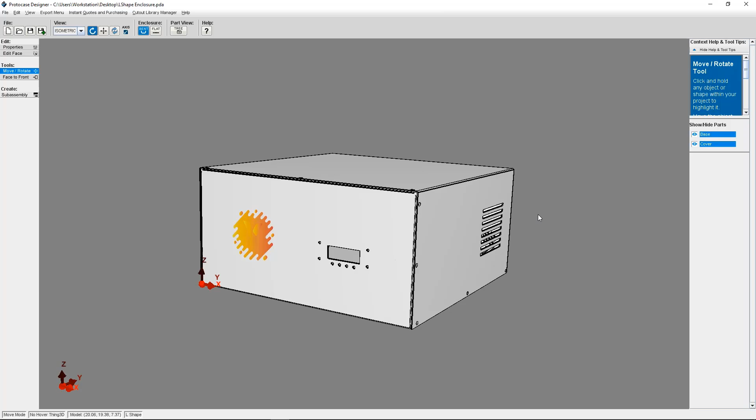So to start, you'll need to open the Protocase Designer assembly file of the enclosure that you want to transfer. I have my L-shaped enclosure open here that I want to start with. As you can see, I've got several faces on my enclosure that have custom cutouts, as well as two faces with digitally printed graphics. I have a logo on the front face and some labeling on the rear face.

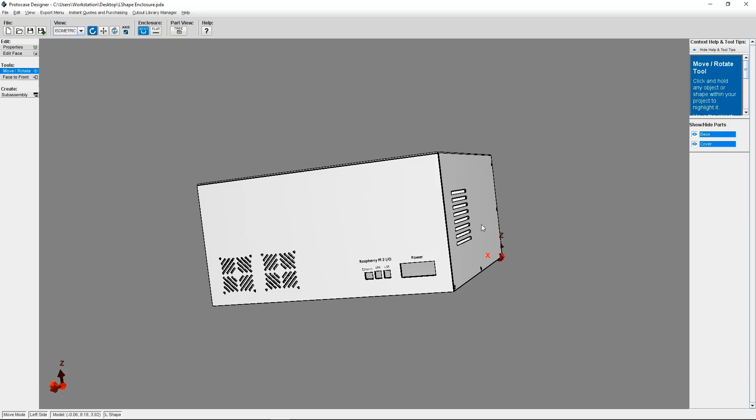Let me show you how to transfer a design to a new enclosure style. So while you're in 3D view, you'll go to File in the top menu and choose Transfer to New Enclosure. A new dialog called Transfer Design to New Assembly will open. So here you'll need to select the new enclosure that you want to transfer your existing enclosure to. I'm going to choose a 5-sided enclosure.

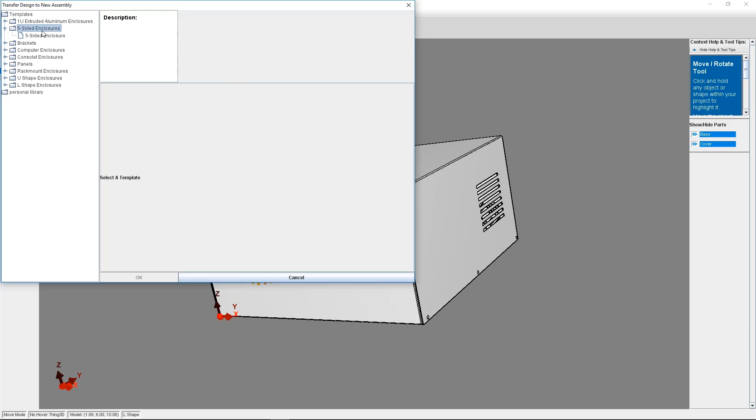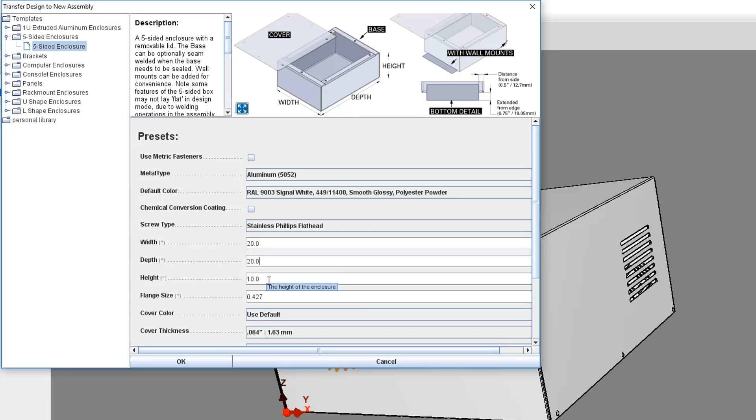So here's where you can change any of the parameters of your enclosure, including metal type, powder coat color, screw type, width, height, depth, and more. I'm going to keep all of my parameters the same, except I do need to change my dimensions. I'm going to change the width to 20 inches because my original enclosure's dimensions were 20 inches wide by 20 inches deep by 10 inches high.

So one thing to note, Protocase Designer will transfer parameters for enclosures of the same category, such as if you transfer between two types of extruded enclosure, nothing needs to be changed. However, if you're transferring from something like a U-shape to a rack mount enclosure, you may need to change some of those parameters manually, so it's a good idea to just go through every parameter and make sure you're okay with it before you proceed. So once you're satisfied with what you've selected, you need to click OK.

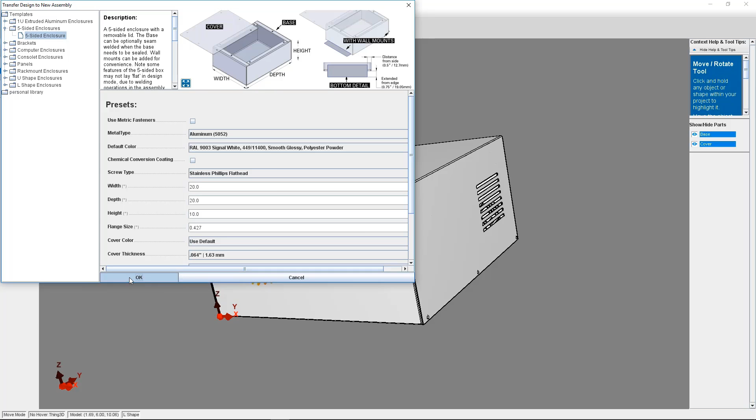So here you'll see a new dialog open called Transfer to New Enclosure. This is where you need to choose which face from the current design should be transferred to your new designer assembly. The software is going to automatically try to detect which side should be transferred to which face. However, you can manually change any face that you wish. I recommend going through each one just to make sure it's going to transfer to the correct spot.

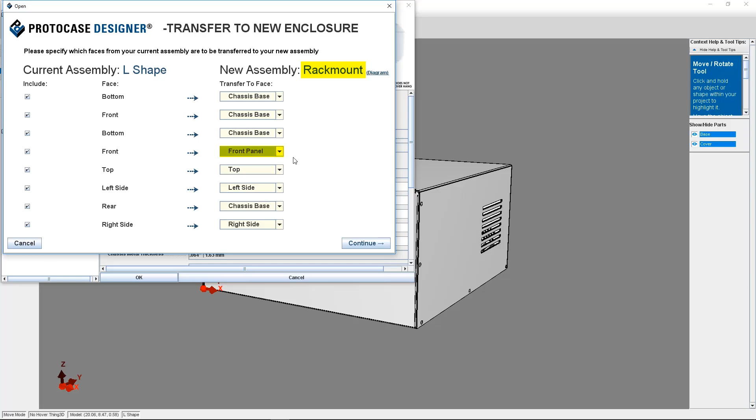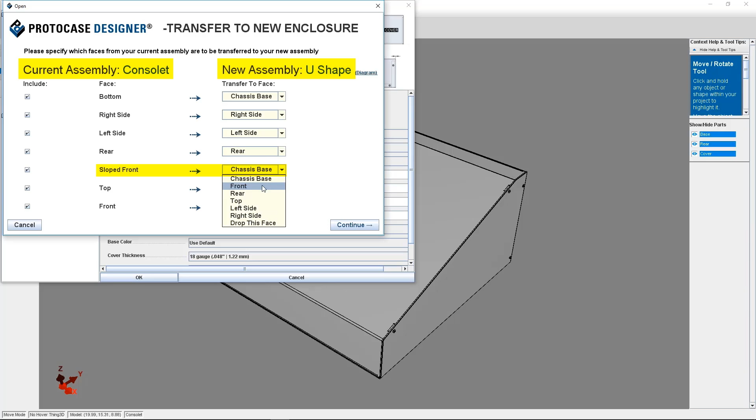Here's another tip. Instead of transferring this face, you can also opt to drop this face. This might be necessary if the enclosure to which you are transferring has fewer faces than the original enclosure that you started with. For instance, if you transferred from a consolet to a U-shape enclosure, you would likely need to drop at least one face, such as a sloped front. In another scenario, you may want to drop a face that has features you don't want to carry over to the new enclosure style.

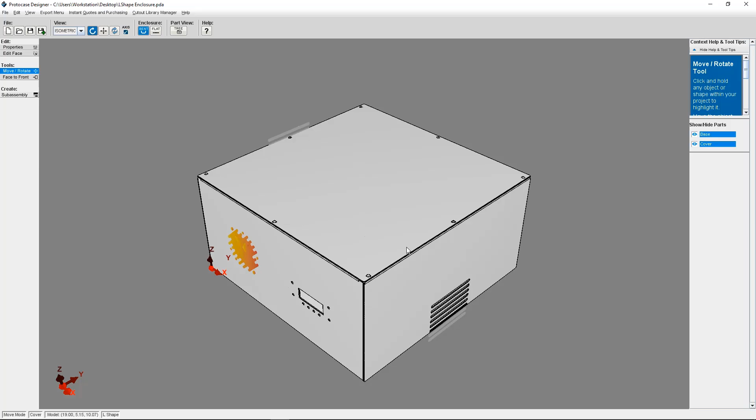So once you've completed indicating which faces should be transferred to your new enclosure, you can click Continue. Or if you want to go back to your original design, you can click Cancel to abandon the new enclosure template altogether. Okay, now I can see my new design, which has been transferred to a 5-sided enclosure. Sometimes the design looks fine at a first glance. However, with mine, you can see that several cutouts and graphics need to be adjusted. All I need to do now is go into the face editor so I can edit each of these faces and adjust things as necessary.

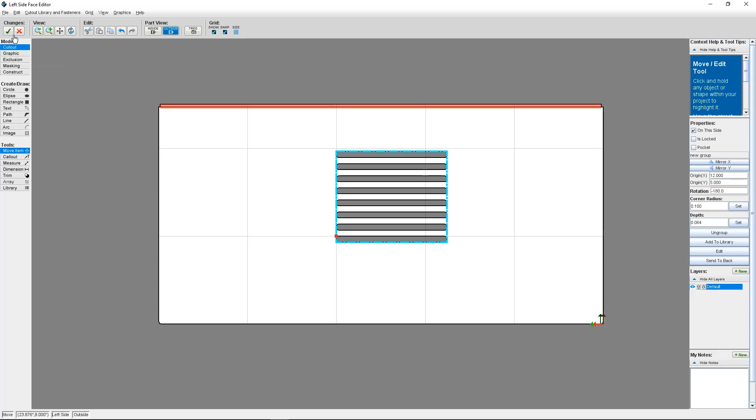So one final caution, sometimes template features such as handles on a rack mount may not transfer to the new enclosure. If that's the case, you may need to manually re-add them to your design. So this concludes our tutorial on transferring an enclosure design.